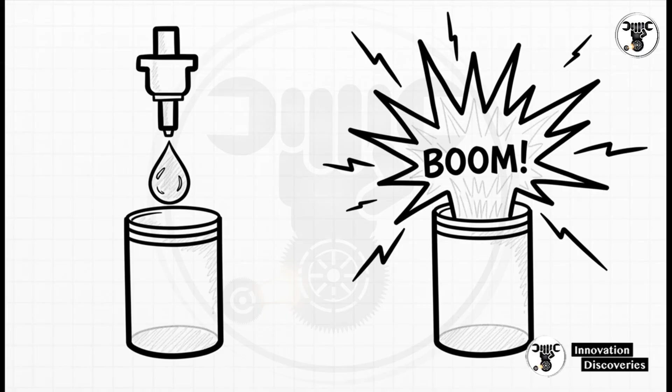Okay, so to really get the solution, we first have to understand the problem. And it all boils down to how early diesels delivered their fuel, basically with one single massive explosion for every single power stroke. Think about it like this. The engine would just dump all the fuel for that cycle into the cylinder all at once. This fuel would mix with the hot, compressed air, and then, boom, a totally uncontrolled explosive ignition. That violent spike in pressure is exactly what you hear as that classic diesel knock.

Now, this whole single Big Bang approach didn't just create a ton of noise. It also put engineers in a really tough spot when it came to pollution. It locked them into what seemed like a completely impossible trade-off. And this right here, this was the great diesel puzzle. You've got two main bad guys in the exhaust: nitrogen oxides, or NOx, which cause smog, and particulate matter, which is basically that fine black soot. The problem was, anytime you tried to reduce one of them, the other one would get worse. It was a total catch-22.

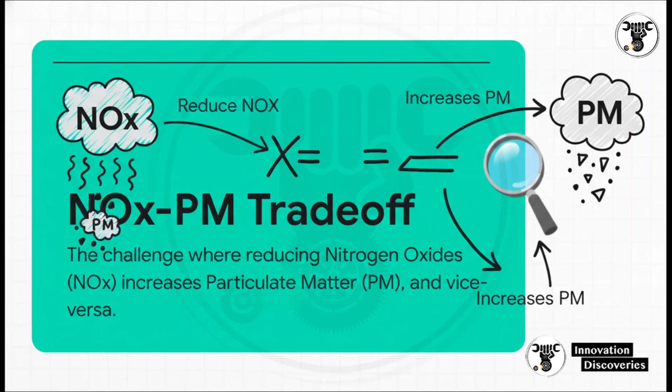This put engineers in such a bind. I mean, if they cranked up the combustion temperature to burn off all the soot, that intense heat would create a whole bunch of NOx. But if they lowered the temperature to cut down on the NOx, they'd end up with these clouds of black, sooty smoke. For decades, it really seemed like there was just no way to win.

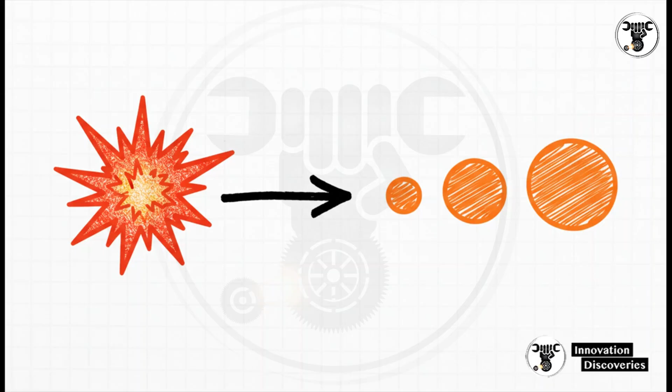But then, researchers started playing around with a deceptively simple idea. It was a concept that had actually been kicked around since the 1930s. But now, they were looking at it again with fresh eyes and modern tech. Instead of one giant, violent explosion, what if you could actually manage the combustion process? What if you could introduce the fuel a little more gently, in stages, and sort of tame that explosion into a smooth, powerful push? And this, right here, this is the secret: pilot injection.

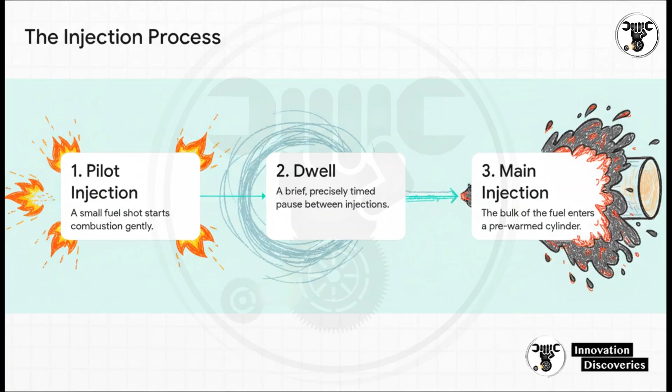It's a tiny little preliminary squirt of fuel, we're talking just 5 to 10% of the total amount, that goes into the cylinder just moments before the main dose. It's kind of like a warm-up act for the main event. So here's how it works. First, that small pilot shot gets in there and starts a small, gentle combustion. Then, there's a very precisely timed pause. They call it a dwell. Finally, the main injection of fuel enters a cylinder that's already warmed and perfectly ready for it.

And the effect of this one tiny change? It was absolutely revolutionary. I mean, it fundamentally altered the physics of what was happening inside that cylinder. This is seriously the perfect way to think about it. The old way was like dousing a log in gasoline and tossing it on a fire. You get that sudden, violent whoosh. Pilot injection is like carefully lighting some kindling first. The big log catches fire smoothly and burns powerfully, but without that explosive shock.

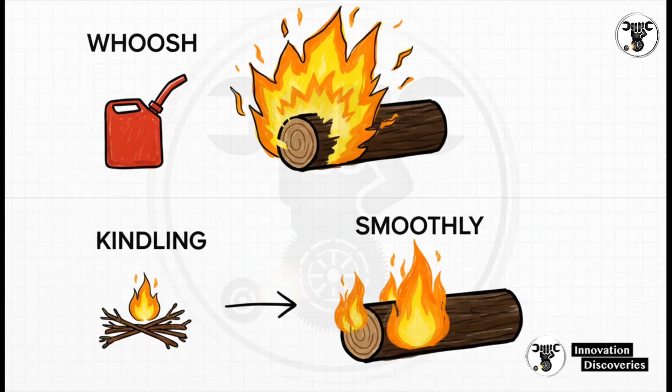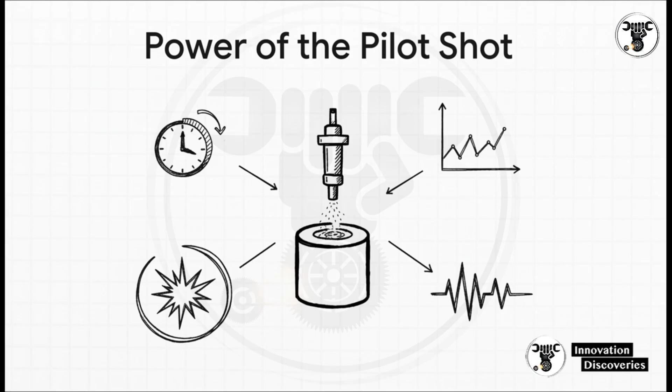So what's happening on a technical level is that this pilot shot basically preps the cylinder. It shortens the time it takes for the main fuel to ignite, which lowers the peak heat release, and it dampens that explosive pressure spike. That is the magic that silences the knock. And the result was just staggering. Research back in the mid-90s showed that a tiny little pilot injection could slash combustion noise by as much as 10 decibels. Now, to our ears, that's a massive, massive difference. It completely transformed the entire character of the engine.

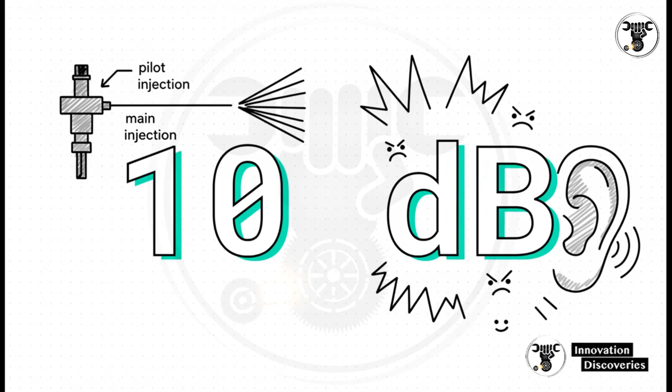But the story doesn't stop there with just noise reduction. See, once engineers had this incredible new tool, this ability to inject fuel multiple times in one cycle, they realized they could use it to finally solve that impossible emissions trade-off. So they started experimenting with adding a third small squirt of fuel. But this time, it was after the main power event was already over. This injection wasn't about making power at all. Nope, this one was all about cleanup.

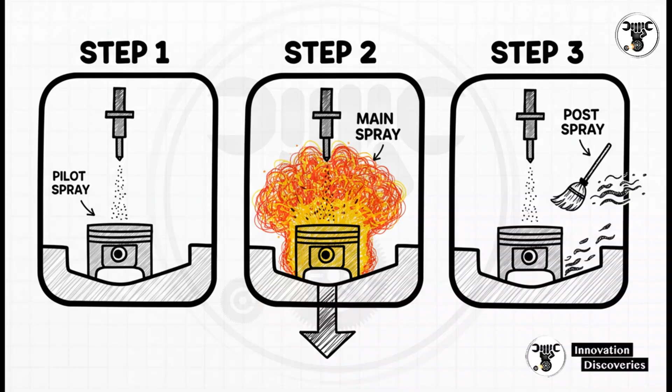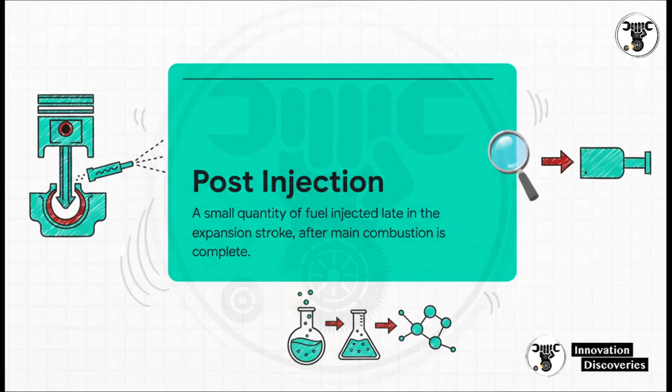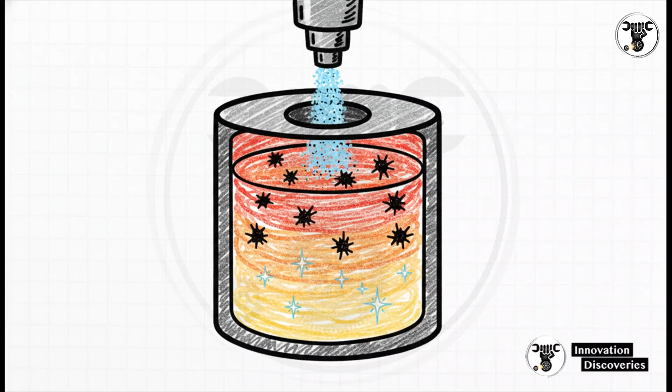This is called post-injection. It's a precisely timed shot of fuel whose only job is to manage the chemistry of the exhaust gases that are still hanging out in the cylinder. By injecting this extra little bit of fuel into the hot, expanding gases, engineers could literally burn off leftover soot particles after the main combustion. This meant they could tune the main event for lower NOx and then use this post-injection as a separate cleanup phase for the soot. They finally broke the NOx-PM trade-off.

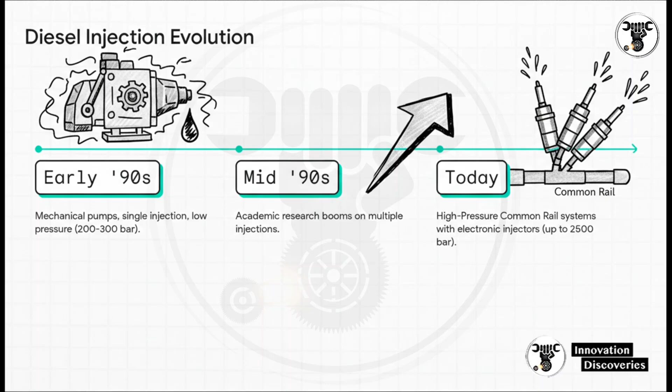So when you step back and look at the evolution of the diesel engine, you see this really clear journey away from just brute force and towards incredible, microscopic precision. Back in the early 90s, you had these mechanical pumps forcing fuel in at maybe 300 bar, which is around 4,400 psi. Fast forward to today, and electronic common rail systems can fire off 5 or more precise pulses per cycle at pressures hitting an incredible 2,500 bar. That's over 36,000 psi. And that's the real secret, right there.

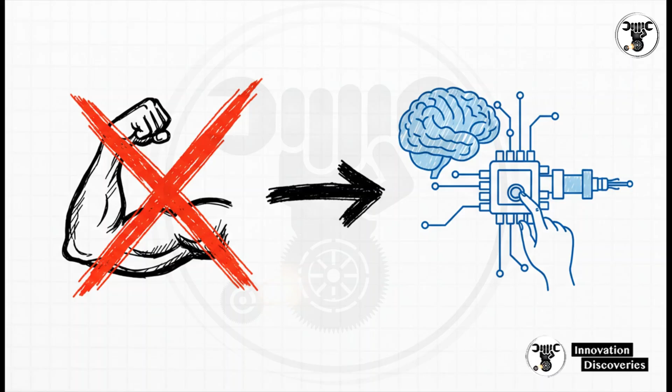The quiet, clean, and efficient diesel engine of today wasn't born from some quest for more raw power. It was born from the quest for microscopic, millisecond-level control over the combustion event itself. This technology just shows us how a problem that seemed fundamentally unsolvable for decades was cracked open not by using a bigger hammer, but by using a more precise scalpel. And it really makes you wonder, with this level of control now at our fingertips, what other impossible engineering challenges are we going to solve next?